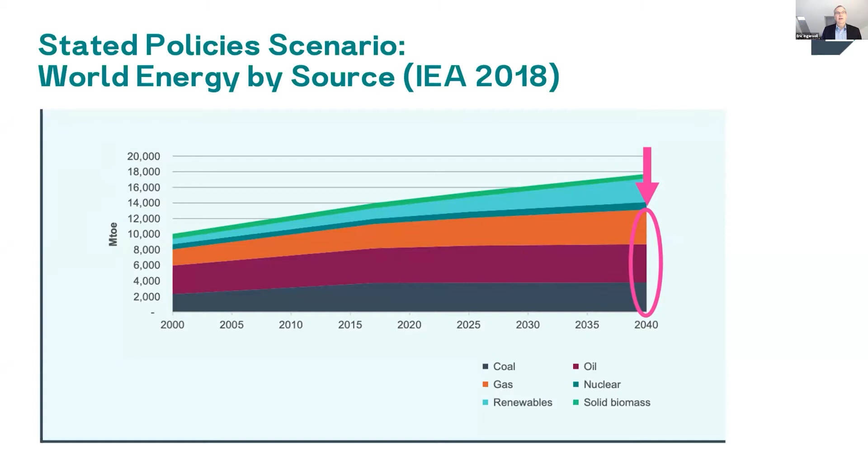So, stepping back for a moment, we have a decarbonization challenge, and the current policies scenarios show that we will fail to decarbonize adequately by 2040 and probably by 2050 as well. So we need to do a lot more than what we're doing right now. And you can think of it like this. We've all seen this graph here, and I've put, you could think of it as a to-do list on top of the graph. We see this graph, but this graph is not going to happen like this by itself.

So what needs to happen is, for example, repowering all the coal plants in the world with a new heat source, converting all liquid fuel use to carbon neutral fuels, replacing natural gas use with ammonia or hydrogen, while developing significant generating capacity in Africa and electrifying all the applications that we possibly can. And actually, we only have 30 years to do this. So we are really far from even having a plan to accomplish this kind of transformation.

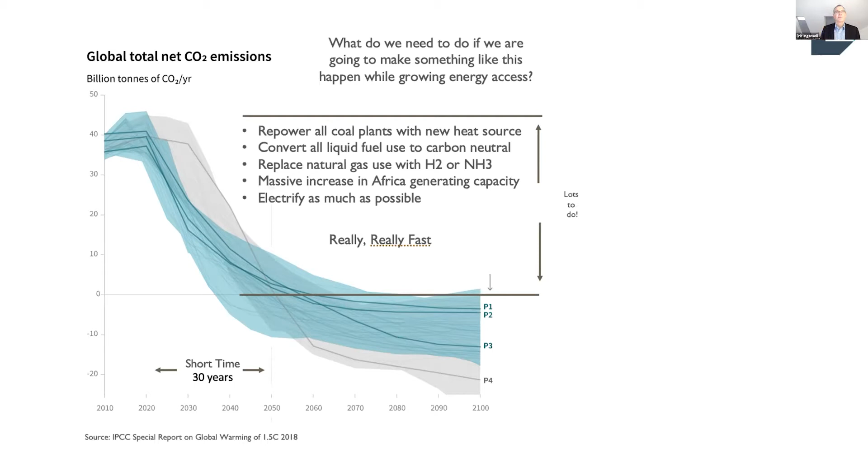So we recently published a study called the Missing Link, How Hydrogen-Enabled Synfuels Can Help Us Achieve the Paris Goals. And I'm going to take you through some of the concepts that we explored in there, which really have to do with how can we apply small modular reactors, or as we like to call them, advanced heat sources, to helping with these challenges. So first of all, we like this idea of the impossible burger.

And the impossible burger is something that is made out of vegetable matter, but it tastes like a burger. You can eat it like a burger. You can buy it where you buy burgers, but it doesn't have the impacts of the meat value chain. This is kind of a drop-in substitute for a burger. And what I want to explore in this presentation is the large-scale production of drop-in substitutes for liquid fuels.

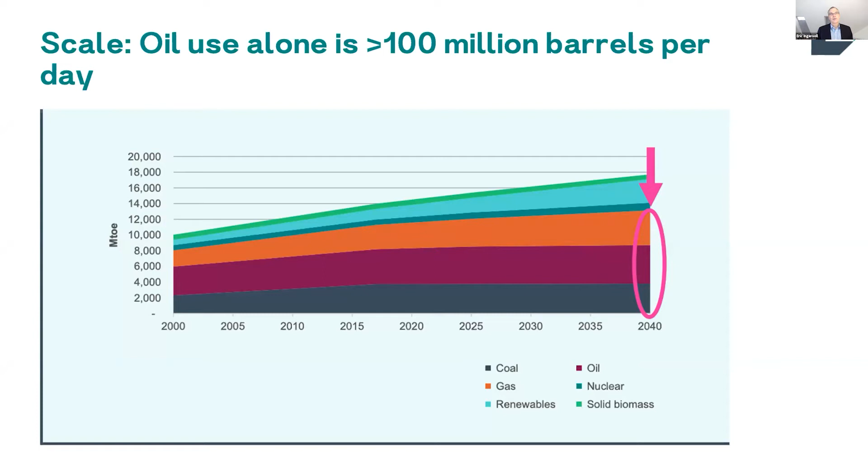So we currently use, maybe this year we're using a little bit less, but the projections are that we will bounce back quite quickly to using around 100 million barrels of fossil fuel per day. That's a very large amount of energy. And if we want to produce drop-in substitutes through the production of hydrogen and then making either ammonia or synthetic hydrocarbons, the fundamental cost that we face is the cost of that hydrogen.

That's very low cost. If you're above that, you're producing fuels which have a market price above the experience of the market with oil prices and finished petroleum products. Does that make sense? So if we're above those costs, our finished synthetic fuels will cost a lot more than the historical prices that we're used to in the liquid energy sector.

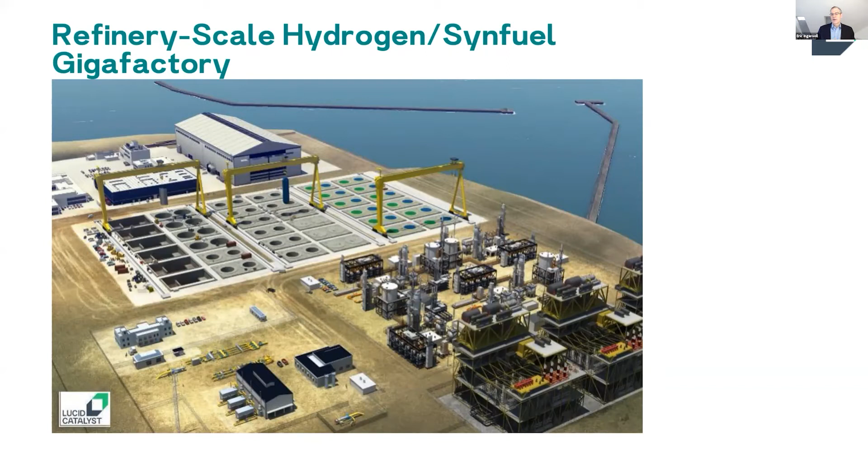And that is providing heat and electricity to the hydrogen production and synthetic fuels production systems that you see in the lower right. So this is ultra low cost nuclear energy dedicated for hydrogen and fuels. This is bringing the factory to the project. The other model is to bring the project to the factory.

And in this case, the factory is a shipyard, an advanced modern shipyard, where there's highly automated processes like welding and panel production, and where large modules, as you see in the foreground, are produced repeatedly by the same teams in highly productive work arrangements. And then those are more or less finished and then brought together and connected into the whole to make the whole ship.

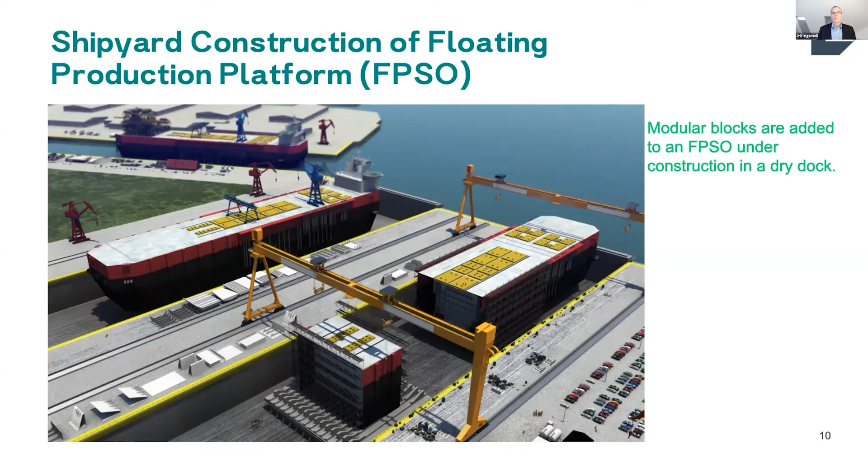And in this case, what we're making in this visualization here is a floating production platform, which has advanced heat sources on board and makes hydrogen and synthetic fuel, storing the fuel in the hull and offloading to, in this case, a bunker ship, which is going to be refueling ships. So this is a visualization of making synthetic fuel for the shipping industry.

And we think this can produce ammonia for an equivalent oil price of about $60 a barrel. So $60 a barrel of finished product made as ammonia. So very cost competitive with the long-term cost of finished oil products. The slides will be available. I'm not gonna go through this in detail, but our report shows

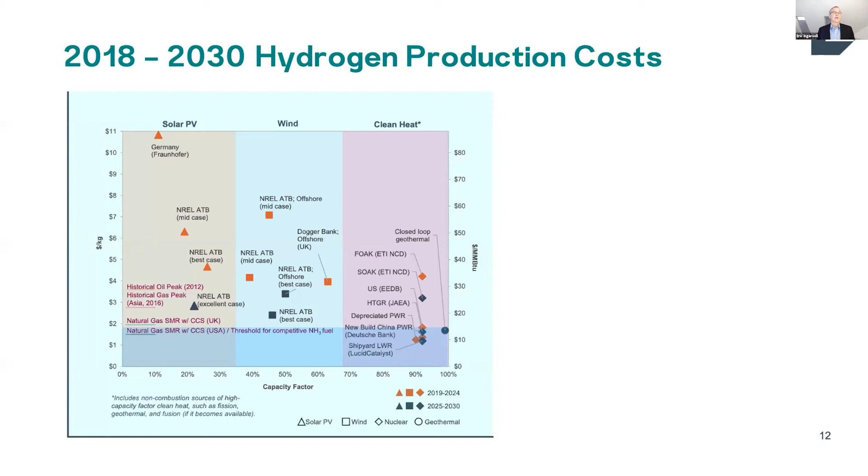So what you do see there over on the right is that if you have low cost nuclear plants, such as might be possible producing the plants in a shipyard, you can achieve very low cost hydrogen that meets the requirements that I laid out in that guardrail slide. So very briefly, we do a scenario in our report that basically says, what if we have to replace all of the liquid fuels that we currently use on planet Earth? And we show how you can accomplish that substitution.

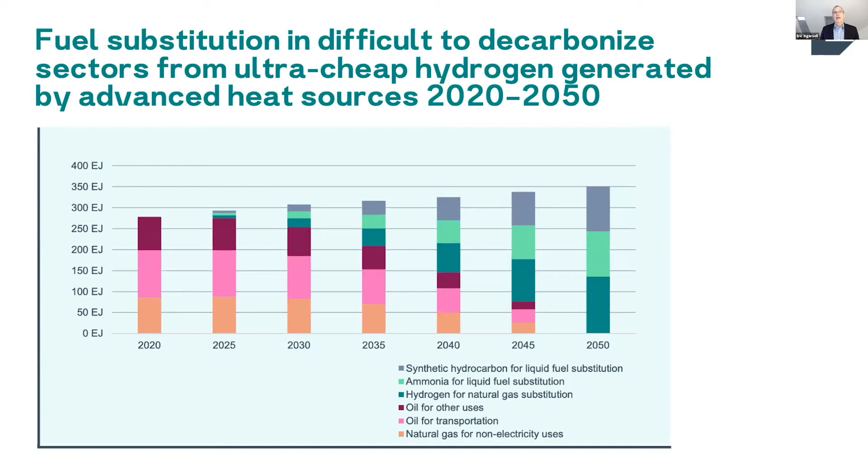And in fact, using these shipyard manufactured plants, we show that the total investment required to achieve that conversion is less than the total investment of just continuing to produce the oil that we need between now and 2050. So in other words, the oil industry is projected to spend around $24 trillion between now and 2050 just to maintain that flow of oil. If you did this strategy, you would spend 17 trillion. So it seems like it might be cheaper to save the planet than to destroy it.

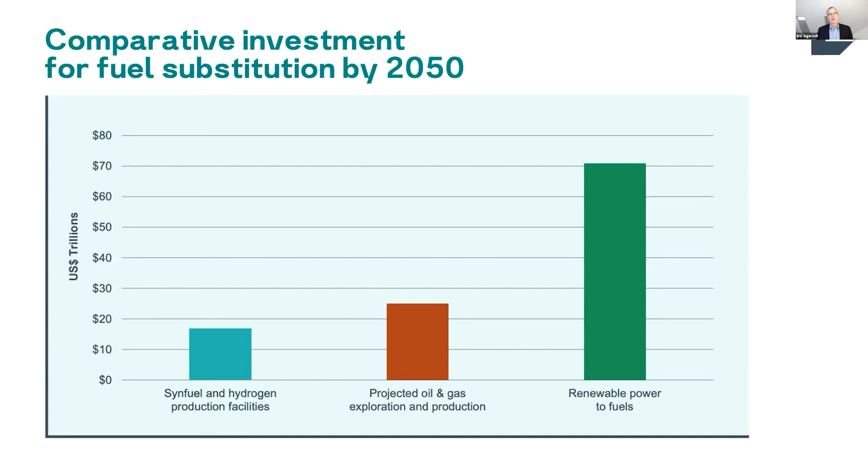And by the way, if you were using renewable energy systems like wind and solar, and in this case I modeled combined wind and solar projects using 2040 NREL projected costs, you would need to invest $70 trillion to produce the same amount of fuel.

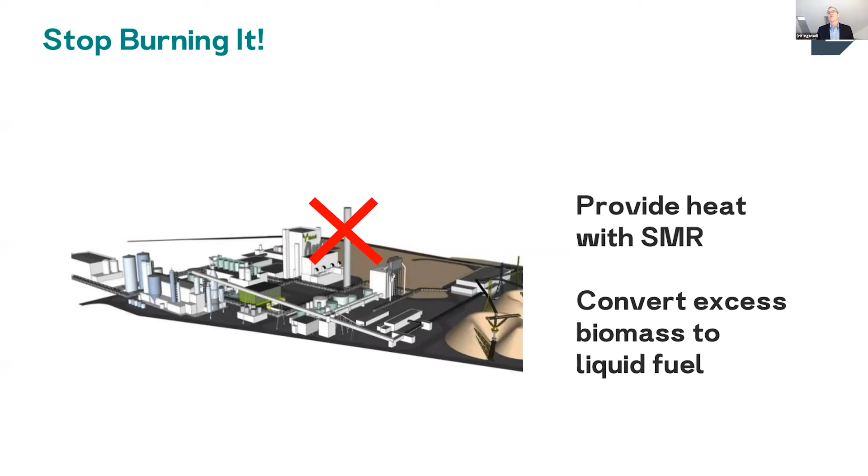So the question for Sweden is, where do we get the biocarbon for large-scale synthetic drop-in hydrocarbons? Well, stop burning it. Today, the paper industry and proposed biorefineries in Scandinavia all assume that you're going to get your heat from continuing to combust waste biomass. And as these plants get more efficient, they actually end up with excess biomass, and many of the proposals assume that you burn that extra biomass and make electricity. So let's stop burning this and convert the excess biomass to liquid fuel.

There's work going on in the US; MIT has a project looking at nuclear plus biomass to make synthetic drop-in hydrocarbons. Nuclear-enabled biomass gasification increases the carbon efficiency by getting the heat and hydrogen required from a nuclear source. So instead of burning 2/3 of your biomass to make the heat and putting that carbon in the air, you can actually make 100% of your carbon into the fuel. Depending on the cycle used, this can produce up to 3 times the fuel compared with traditional biomass to liquids. This enables large new markets outside the currently less profitable paper sector.

It also combines 2 industrial sectors where Sweden is very strong: nuclear and biofuels processing. And it addresses a critical global need for the decarbonization challenge.

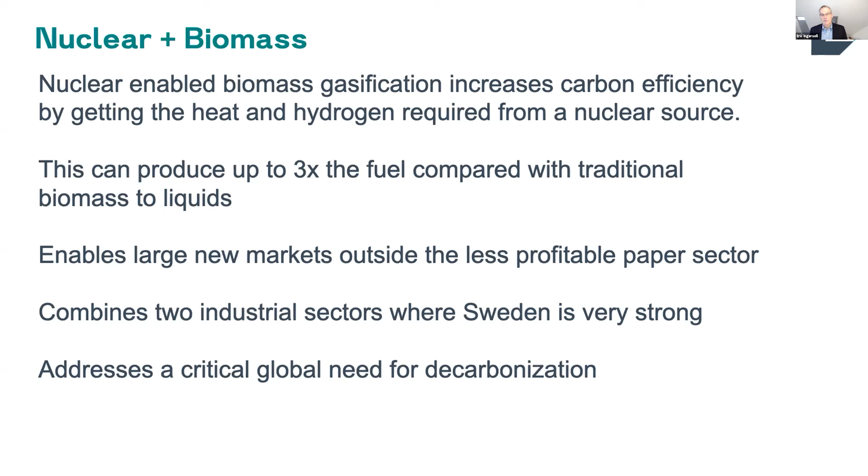So, given the scale and urgency of the required clean transition and the ongoing growth of the global energy system, we really need to look at how to leverage all zero carbon hydrogen production options. And advanced heat sources, whether they're light water advanced SMRs or higher temperature reactors beyond that, are able to power the production of very large scale, low cost hydrogen, which can then be used to make synthetic fuels. But we really need to look at the deployment models and how to get down that cost curve.

We can't just take our current designs and say we're going to make them smaller. It really has to be a transformation of the production and delivery system for the heat sources. And our report, The Missing Link to a Livable Climate, sets out a pathway to achieving this kind of decarbonization. These are sectors right now for which there's no credible solution being proposed.

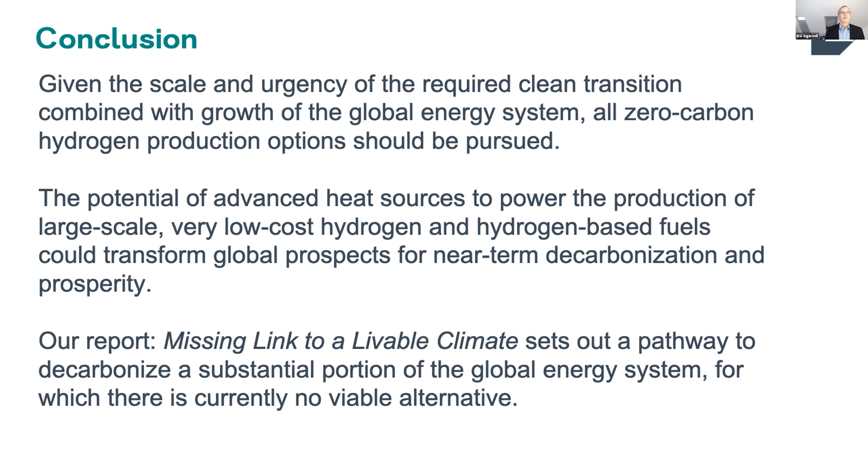So thanks very much. That's my presentation. I'm happy to take any questions.

Truly fascinating presentation. So starting with that interesting number you proposed, that the cost of hydrogen needs to be somewhere between 50 cents and $1.50. What does that mean in terms of dollars per kilowatt hour, in terms of levelized cost of electricity? Have you made an estimate of that?

Yeah, sure. There are actually some very good reports on this. A depreciated light water reactor, such as the kinds you have in Sweden today, if you assume it has not had significant capital investments recently, so you're more or less dealing with the operating costs of the plant. At least in the US market, those are projected to produce hydrogen for somewhere between $1 and $1.50, assuming high temperature electrolysis systems. So what I mean is that I guess you need electricity at some price to get to that. Yeah. So that cost is somewhere between $25 and $30 a megawatt hour.